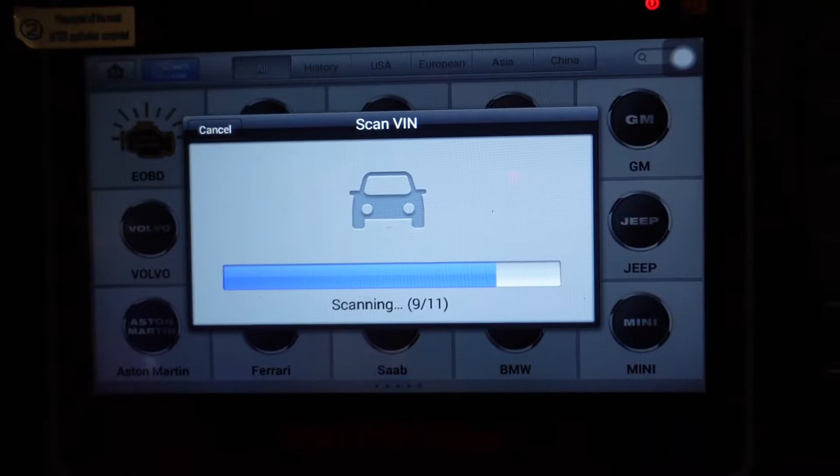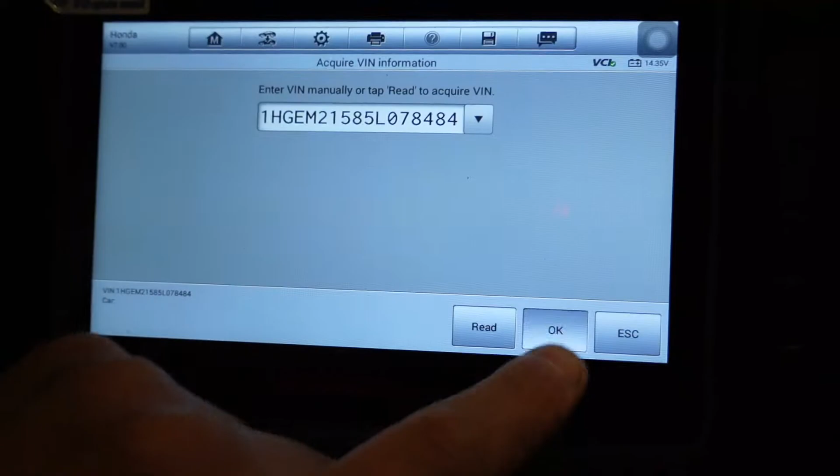Today we have a 2005 Honda Civic, and we got the infamous check engine light right here. We got 257,000 miles on the clock. I just put on a head gasket, so it's all good to go. The only thing we got is P0139. So let's go ahead and scan it with our scanner here. This will take a while.

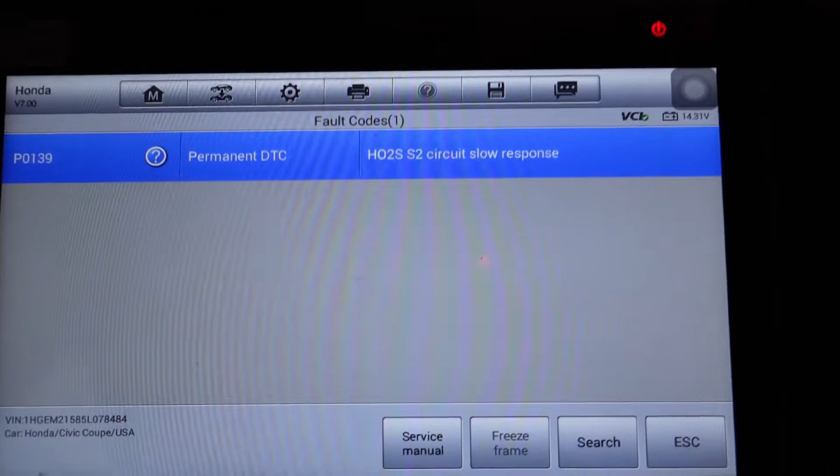Okay, that took a little while. So let's see what we got. Okay, so we do have a P0139. There we go. It's the O2 sensor 2. There's only 2 on this vehicle, so let's check out what's going on. Let's look at our live data. Let's graph both of them, see what's going on here.

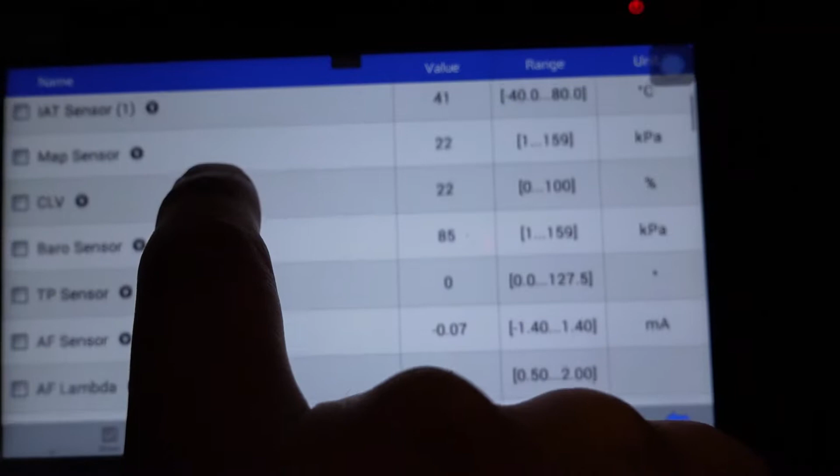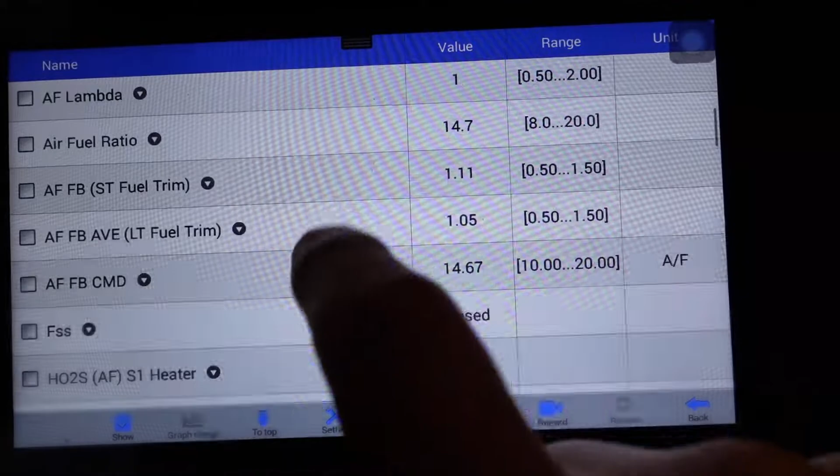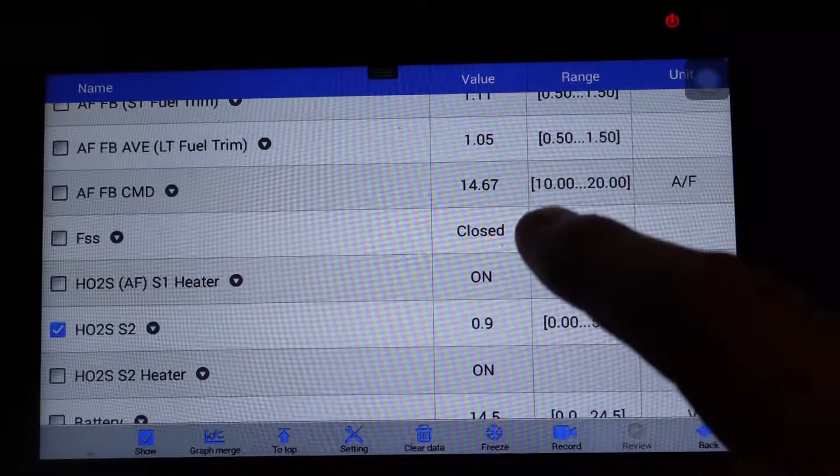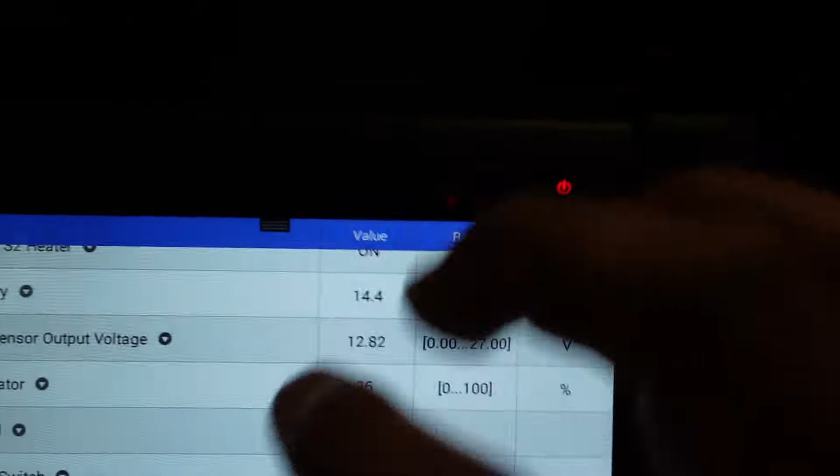So the first one would be known as an air fuel sensor. Second one here. Let's grab those 2. By the way, this has to be on a closed loop system. Looks like we've already achieved it here. The car was running for a good while, it's all warmed up all the way. Let's go ahead and just show those. Let's graph them.

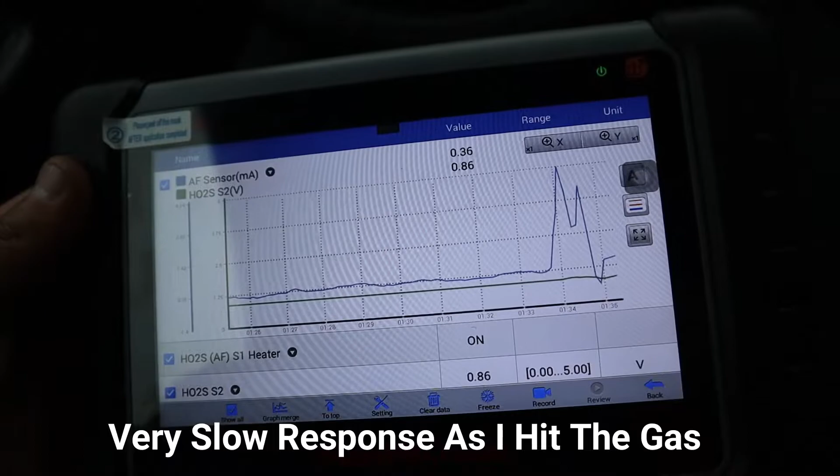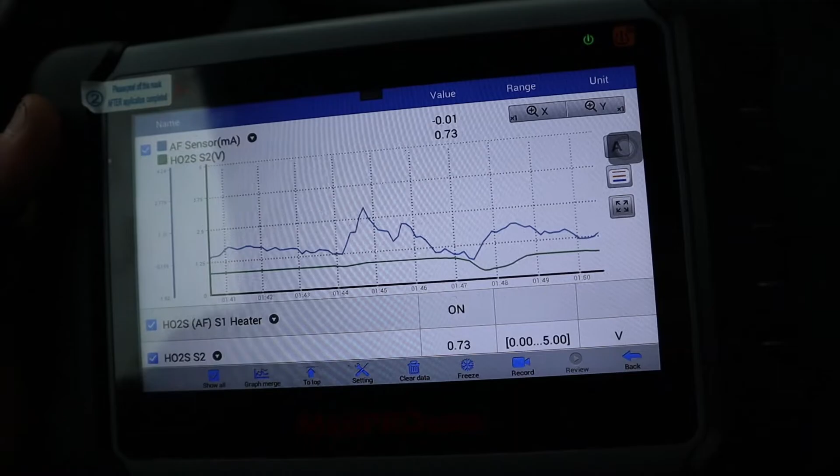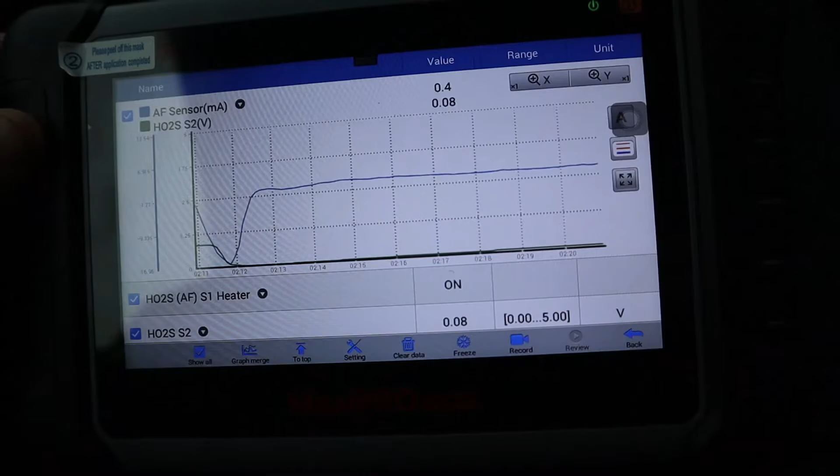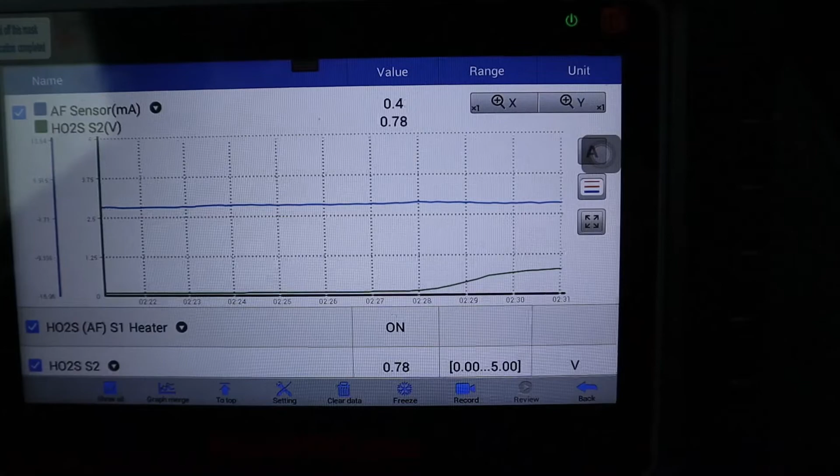Okay, I'm accelerating. Our air fuel sensor is going a little crazy. That'll be bank 1, sensor 1. I'm not getting much response from our other one. Looks a little flat. Okay, it was going back up, but it's definitely really slow. Let's see if it'll go back up. Looking at our valley right here. There we go, we're starting to climb. Yeah, that's acting really weird.

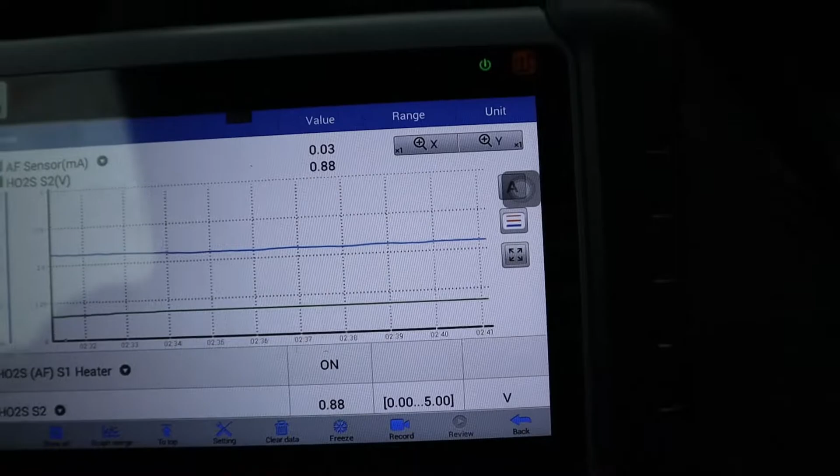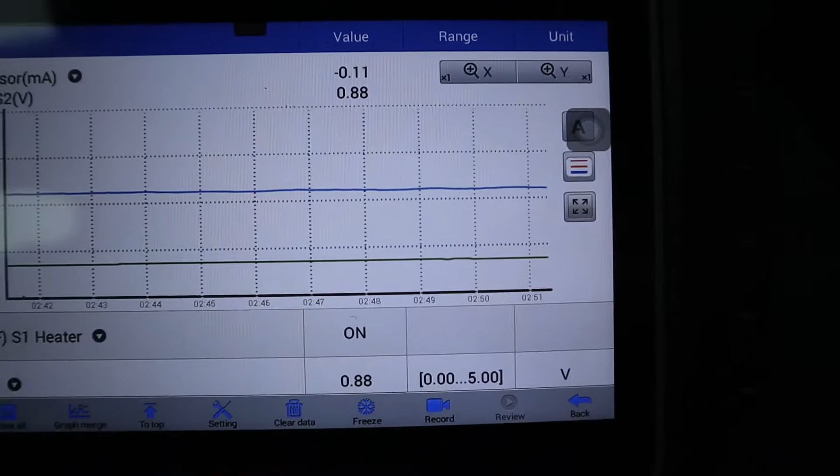So I gotta say right away that this is an oxygen sensor. There's not much else it could really be, so let's go out and change it. Now that we know what it is, sensor 2 actually follows this gray connector and this light blue wire going down, so we gotta lift up the car.

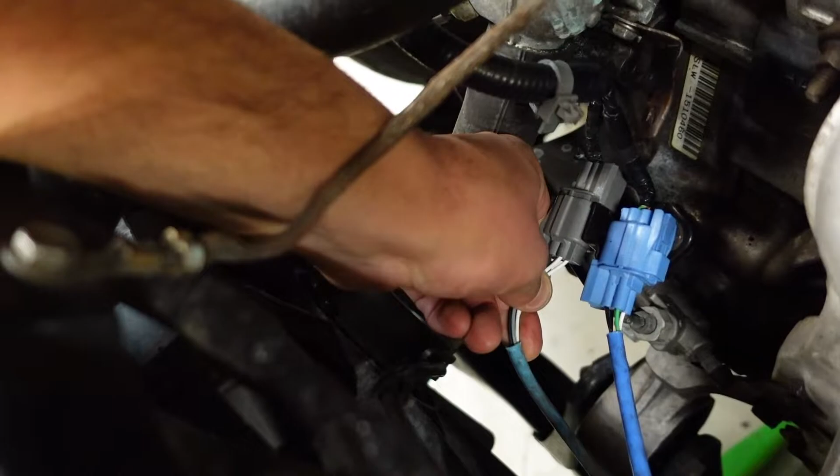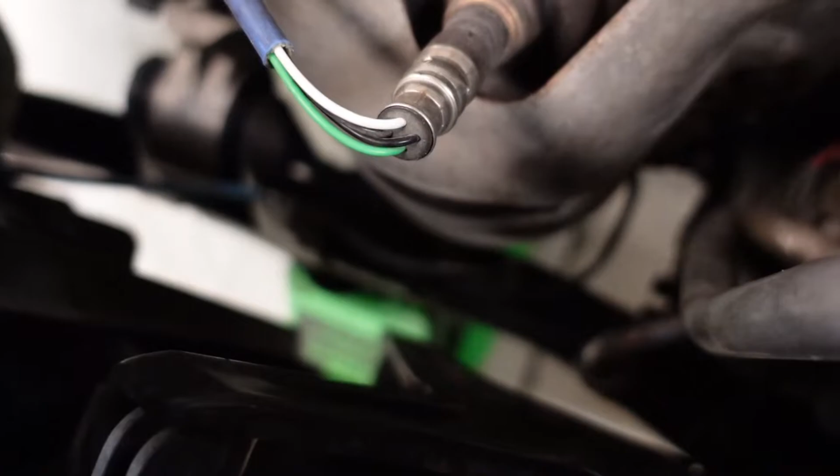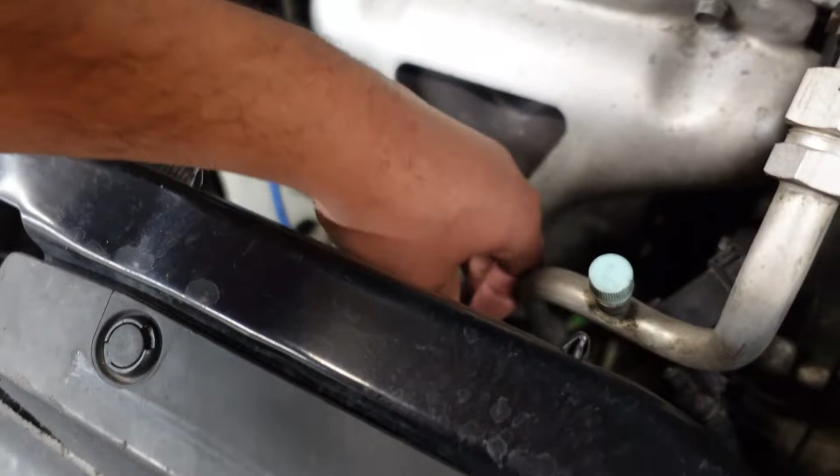First thing we want to do is unplug this sensor right here. It's already broken, so I'm just gonna pull it by the wires. Down here there's a holder. Careful if you've been running the car, because it's gonna be really hot. And then there's one down there; trust me, it's right here. Pull that wire out. Now we can leave it loose. Then go ahead and lift up your vehicle right here in the middle. Get your jack stands on the pinch welds.

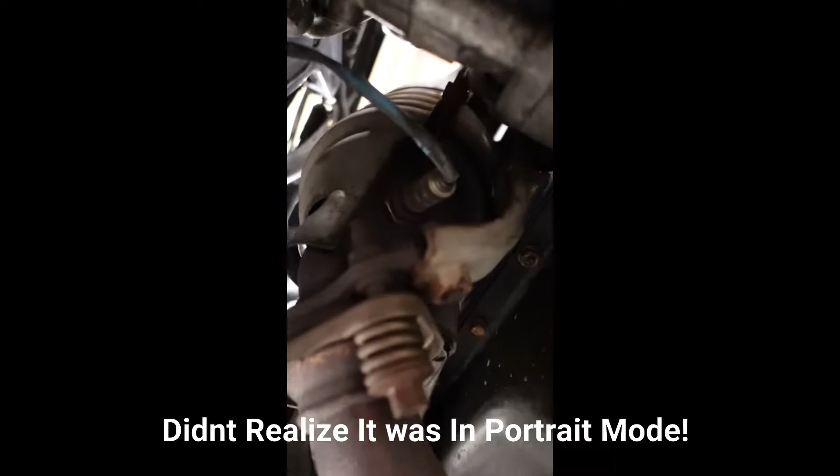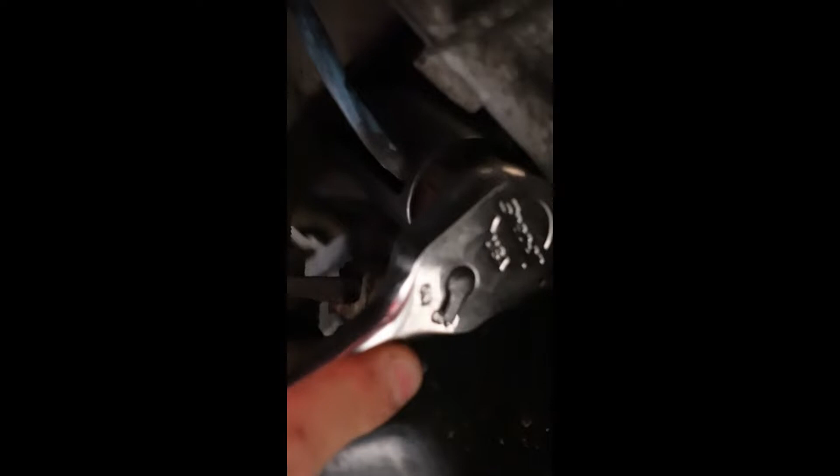Under the car, I'm gonna use this O2 sensor socket, the long 3/8. Under the car, you're gonna see the sensor right there. Trying to do this with one hand. Once you lock it down, that was easy.

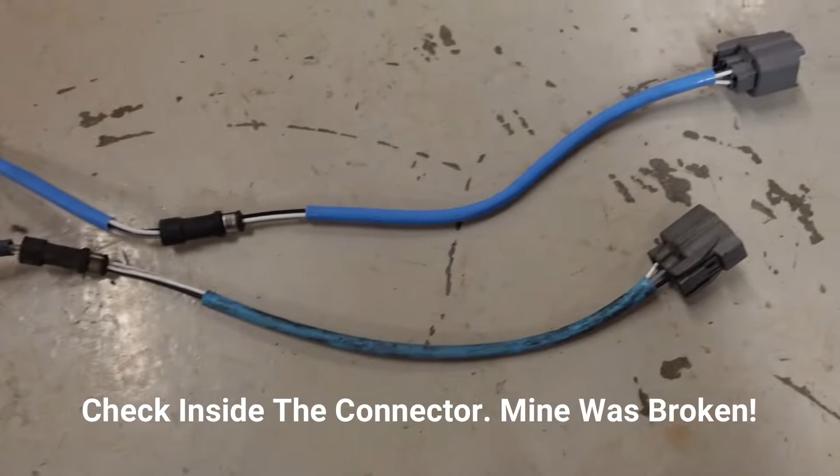Once you got it out, go ahead and compare the two. As you can see, these look basically exactly the same. Little faded discoloring, but that's about it. So let's go ahead and throw it on. Make sure you take that cover off, and this should come with anti-seize. If it doesn't, throw some on the threads right there, and then up we go.

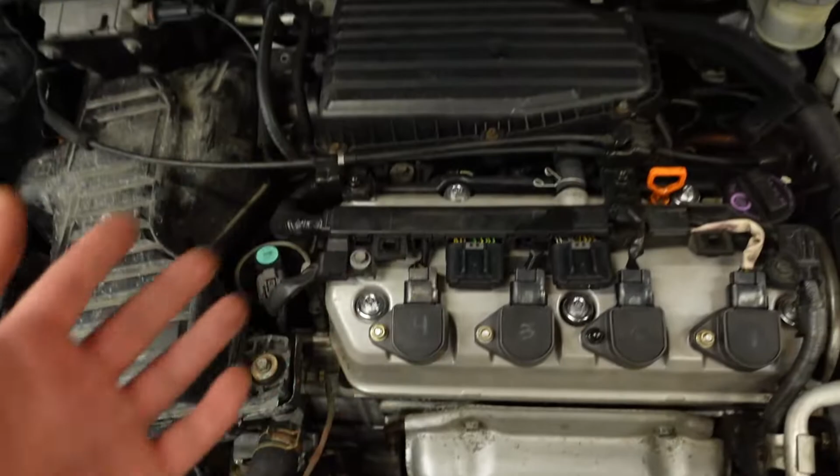Something very unfortunate happened to me, where I had to splice it into the old connector. Inside the connector was broken. It looked like it was a returned product, and I couldn't use the connector. You guys probably won't go through this. I needed the car as soon as possible, so I had no time to return it and wait. Anyway, let's go check out the live data and see where it's changed.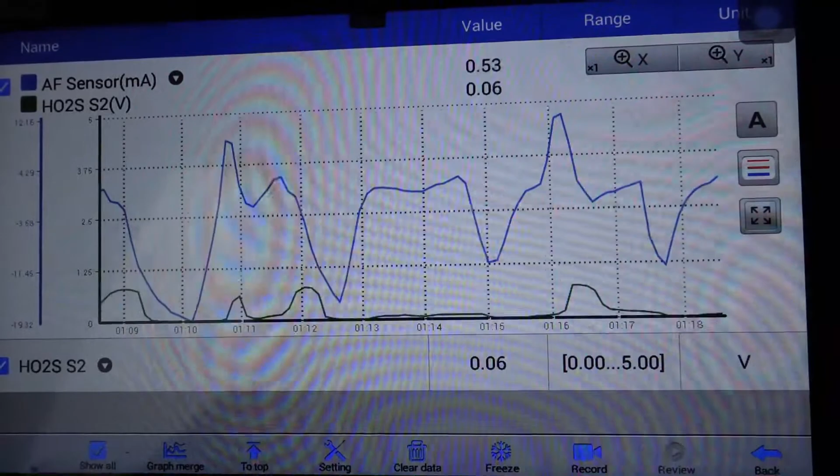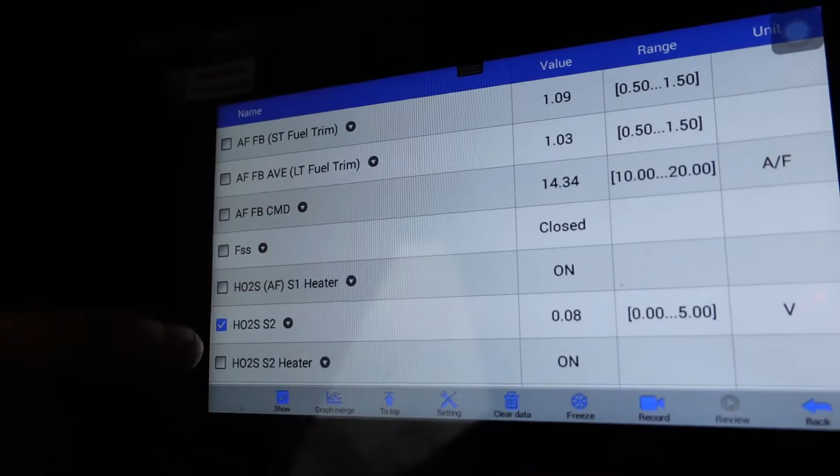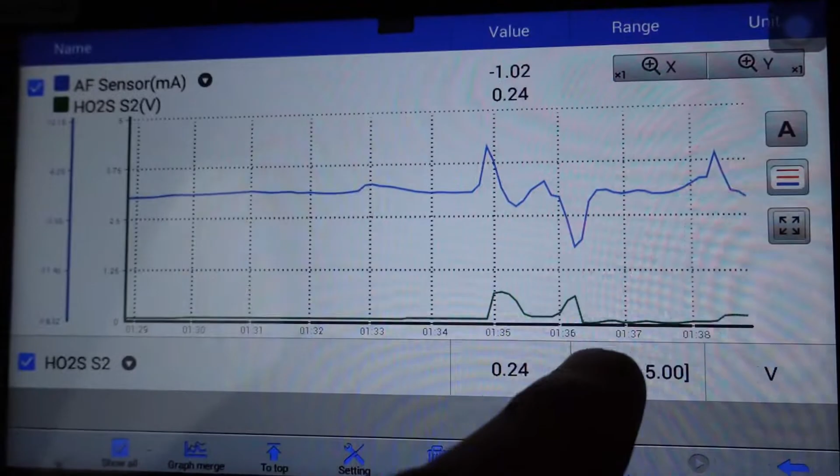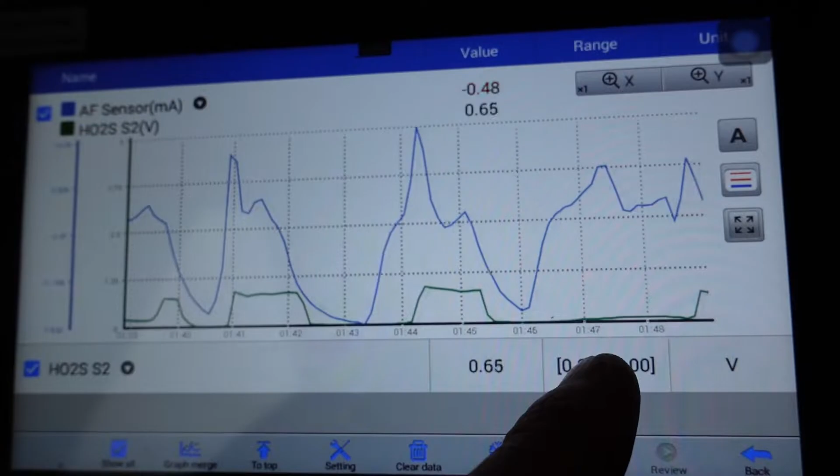I erased the codes a couple days ago, and obviously you're gonna look at this when it's closed loop. Let's go ahead and show. Before, I could barely get a response over here. As you can see, when I'm stepping on the gas, the green line is our sensor 2, and it's responding very well now, which before was more of a flat line and I couldn't really get it to do anything.